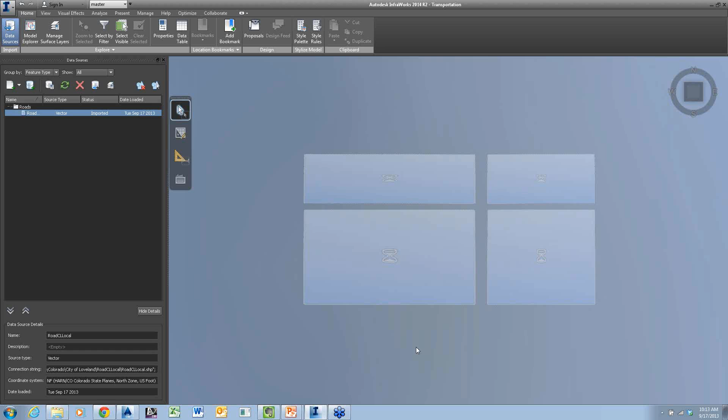I'm going to go ahead and close and refresh this, and it's going to bring that shapefile in and stylize it for me. Got some thinking to do. Now, if you notice, it takes a while to do this - it takes a while for it to take that data, process it, bring it into InfraWorks, and make it into something that it can display. Once you've done this process, it's really quick to open up the file after it's done. It's just the converting it into something that it can read easily that takes a little while.

If you think about it, this is pretty phenomenal to be able to pull this into the system like this, and make it fully usable. And since we're talking water recently, it's on everybody's mind. I've got some water here, some lakes, so I'll go ahead and bring in my lakes.

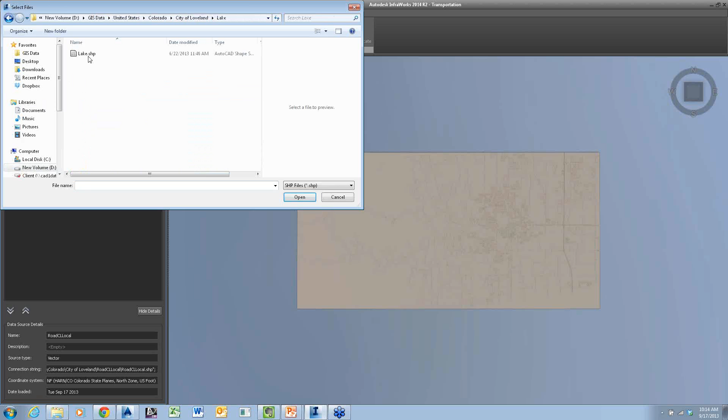Using the same method I brought the roads in, only difference is instead of saying, hey, these are roads, I'm going to say, hey, this is water. And again, this is no smoke and mirrors - this is from, is it the city or the county? I got this from the city of Loveland. Yeah, I configure this data, and I say, hey, this is water.

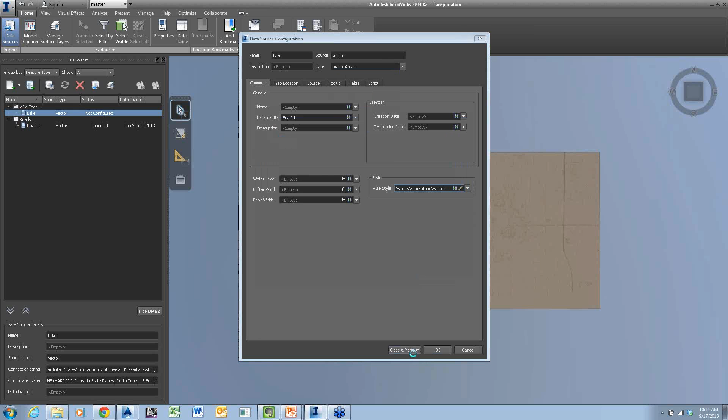I give it a style. I'm going to just use this splined water style, close and refresh that, and it's going to bring in all the lakes in the city. And then I have another shapefile for the rivers that I'll bring in as well, or that I could bring in if my project was near the river, which in this case it's not.

But it is near a lake, so that's why I brought it in. We're going to do a new subdivision next to Carter Lake, which is kind of up in the foothills above Loveland. The only reason I chose this area is because it's got some cool terrain.

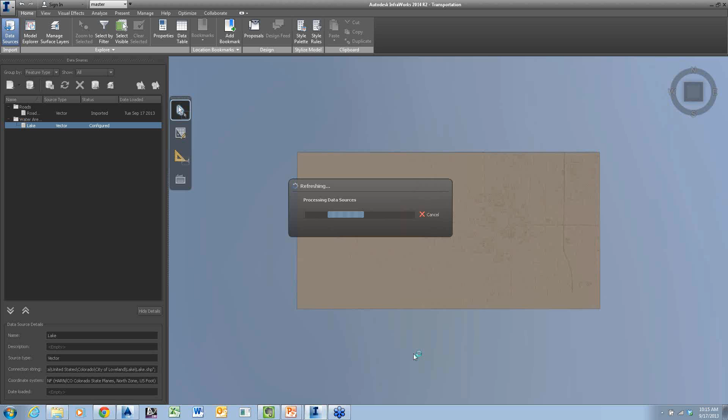Again, it takes a little while for it to process, but I want you guys to see this and how quick it can be after it's done. So it didn't take too long, it did take a little while.

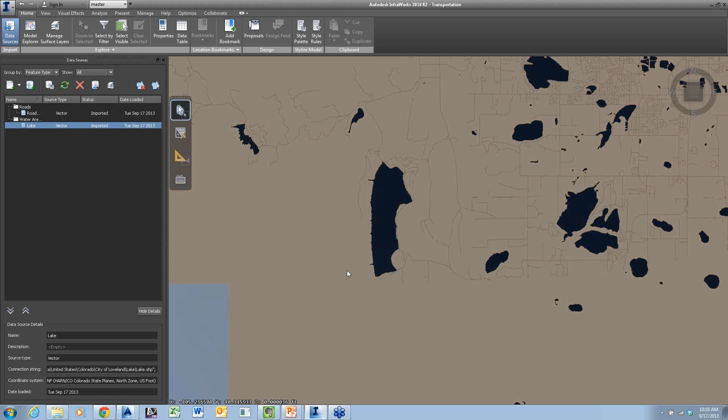Before I start bringing in the intensive data stuff, I'm going to zoom in on my project area. So here's Carter Lake, and we're going to put in a subdivision back here behind it someplace. It's probably National Forest, so nobody can build back there, but I'm making something up for the demo. As I'm working on my project, I don't want to be encumbered by the entire data set, so I'm going to go into my model options and model settings.

I don't want to use the entire model, I'm just going to use a bounding box. Where do I want it to go? Maybe something like this, just around Carter Lake.

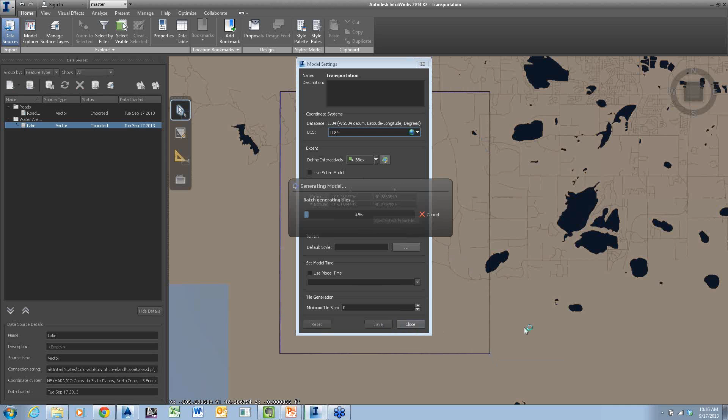Well, what I like is that you're not only doing this for the demo, but you're messing with the man at the same time, sticking a subdivision right on government property.

So I've got other data, I've got terrain, I've got imagery. So let me go ahead and bring those in. Terrain and imagery are all considered raster data sets. Let me go ahead and find those.

While we're finding those, Joe asks a question: is this infrastructure template out of the box or have you improved the styles? This is 100% out of the box, unadjusted by anything.

For most of our webinars, we try to do that so there's no trickery or anything, no smoke and mirrors. Once in a while you have to set something up, kind of the Martha Stewart 'the pie's already baked in the corner there,' but for the most part we try to be out of the box so you can see what you can do with it.

Now, I downloaded a whole bunch of images for this area from the national map. Honestly, I don't know which of those images are for this area, so I just went ahead and connected to all of them. That's why I like putting in this bounding box, because it's just going to show me the area around me.

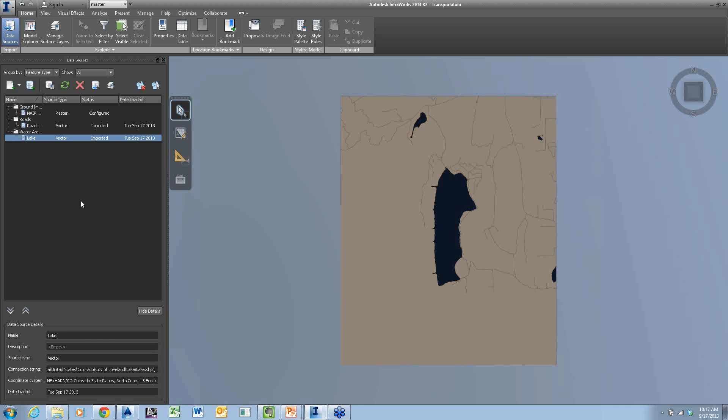Now, before I go through and refresh, let me go ahead and refresh it. So we'll be able to see the imagery, and then I'm going to bring in the terrain as well. Like I said, I drew this bounding box just so I can see this area.

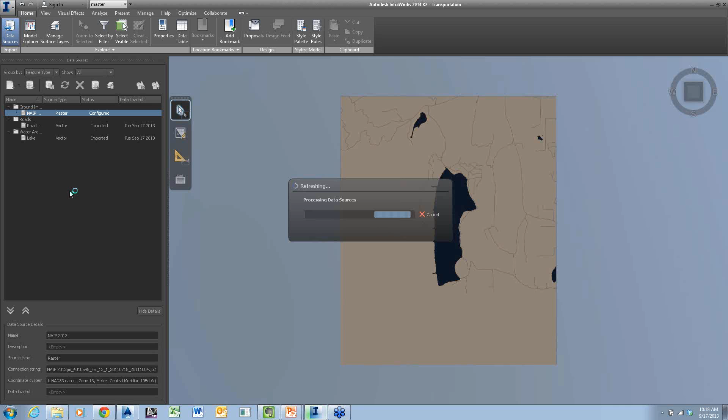Now, Autodesk has a presentation where they did, I believe it was either a 30-mile or 300-mile rail line in InfraWorks, all in one model. So this program can handle a ton of data and handle it really quite quickly.

All right, so there's my imagery, and then we'll bring in the terrain as well. Again, terrain is considered a raster. Let me go find my terrain here for the city of Loveland. So it's a DEM file. I downloaded this from the national map, and as you can see, I've got 2 image files. These are geotiffs basically, it's a .img, but it is terrain.

Now, if you've noticed, as I've done this, I haven't done a single thing with coordinate systems. Everything I've done is just, I want to connect to that data, and I want to connect to that data. I didn't set up a coordinate system for this project, I didn't specify any coordinate systems.

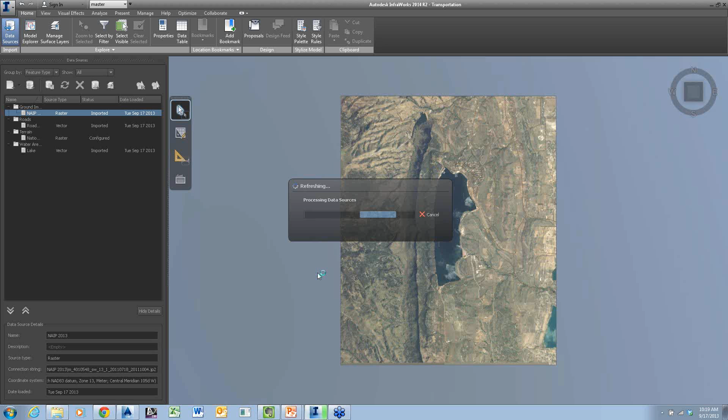As you bring the data in, I think I refreshed the wrong thing here. As you bring the data in, InfraWorks knows the coordinate system of the data, and InfraWorks always works in a coordinate system of lat and long. So I accidentally refreshed the imagery instead of the terrain, let me go ahead and refresh this again. Hate it when I do that.

And this will let us see our terrain. And again, I downloaded all of this data for free. The only thing it cost me was the time it took to find it and download it.

And those funny YouTube videos you watched along the way. The dog getting a kitty and stuff.

And if you want to know where to find this stuff, basically you just go to Google. You go to Google, and you search City of Loveland GIS, or wherever it is you're working. And there's my first hit right there. So look in your cities and look for the county, and it's amazing the information you'll find out there. Just about everywhere I've looked, it's been free.

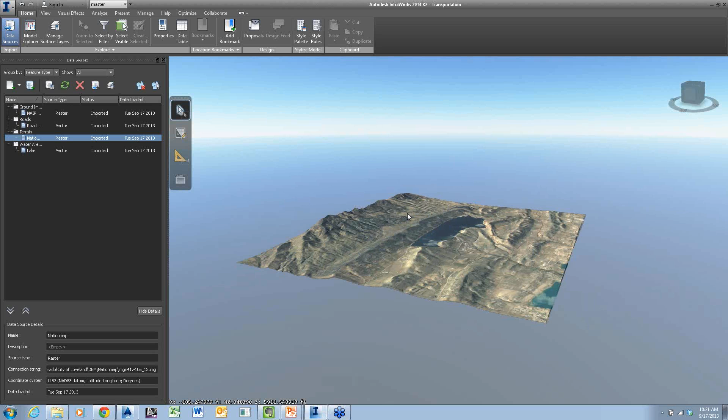I digress. So here's my model, and as you can see, I now have terrain on it. And I can zoom in. Now, through the web interface, this looks very choppy, but on my screen, it's really quite smooth. It's like playing a first-person shooter game.

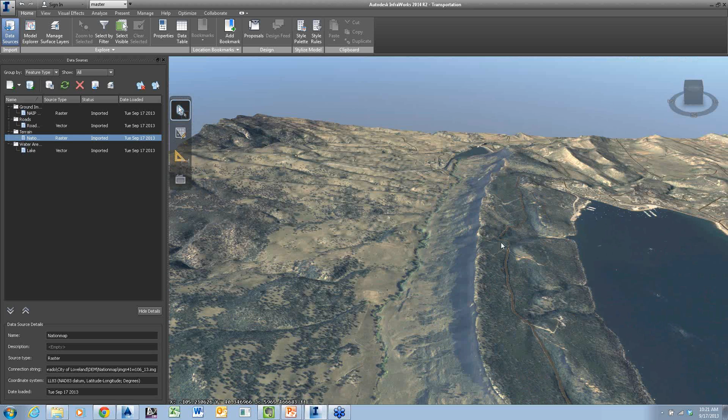All right, so this is the area right here that we want to develop. It's a nice little flat area, but in order to get here, we got to put in a road. The nearest road that we've got, I don't want to come up over this ridge. That's a pretty steep ridge, so this road is not going to be of access use to us. Let's just blow a hole in the ridge. No, we want to keep the ridge because we don't want the nice people over here seeing the lake. Anyways, never mind. So we've got a road up here, and I want to start by connecting into this road.

Now, I'm going to be using the Roads and Highways tools that come with the Ultimate Suite. Now, if you want to get access to the tools that I'm showing you today, you need to do one of two things. You either need to buy the Infrastructure Design Suite Ultimate. If you buy the Ultimate Suite, you'll get access to the Roads and Highways tools. If you don't want the entire Ultimate Suite, you could go with the InfraWorks 360 Pro. Right. And that will give you access to these tools as well.

And you can actually, this is a lease type of a thing where you can just use it for a quarter or a year. So you don't have to spend the thousands and thousands of dollars to buy the software. You spend a fraction of that to get use of it for that term for the project that you're working on. Autodesk is moving in that direction with many of their products, and it's really pretty cool that you can now... You still have the option to buy. Oh, yeah, absolutely. And maybe we can talk more about that sometime, about what makes more sense in any given situation.

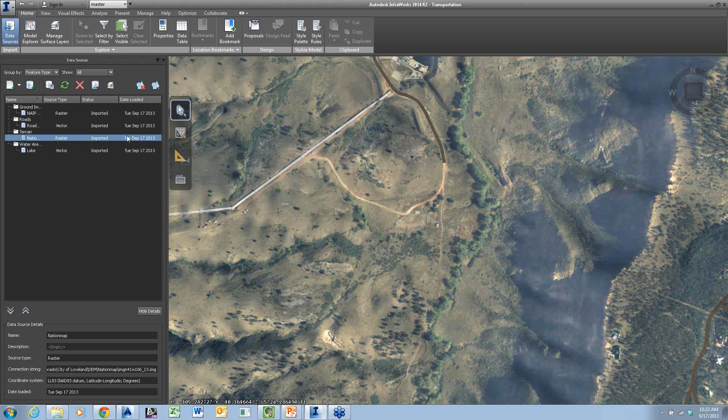Yeah, exactly. So I've got everything done. I'm going to go ahead and save this as a proposal. So this proposal right now is my master proposal. It's as the current conditions. I am going to create a new proposal for this particular road. All right, let's go ahead and just add a new proposal. And I'll just call this one option 1. Maybe I'm going to do 4 or 5 different options to take before the owner and those types of things. So I'll just go ahead and create my option here. This takes a moment because it's got to save the data.

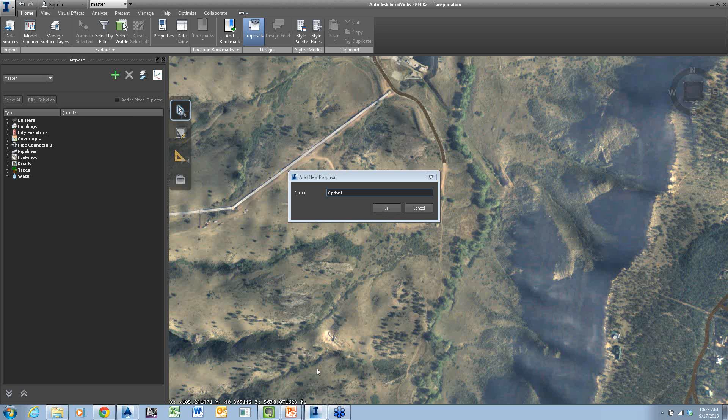And oh no, InfraWorks has crashed. Did it? No, it didn't crash. I just shut it down. I just did that to make a point. I haven't saved it yet. I never once saved. Oh, Brian. I know. Can you believe it? There's the dramatic voice. Thank you, Stan. Add emphasis. All right. So, oh no, it crashed.

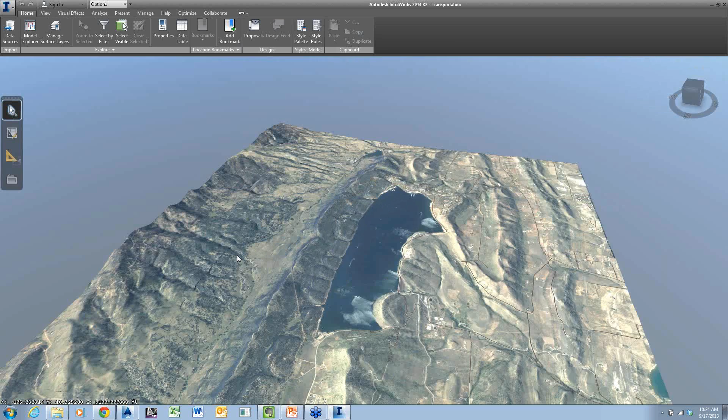So I go ahead and reopen InfraWorks, and I want you to see how quickly this opens again. So here's my transportation. This is the one I just created. No smoke and mirrors here. And I'm back and running. And here's my model. So it automatically saves every time you make a change, which is pretty cool. So okay, I'm going to go make some roads here.

So I've got my proposal created. So I'll come over here and look at my proposals. So as you can see, I've got my option 1 proposal and my master proposal. So I'm working in option 1. Go ahead and close my proposals now. And I'm going to create some roads. So I'm going to come over here to this little bar on the far left-hand side, and I'm going to choose Create Edit Features.

What do I want to create? Well, that's what this bar up here is all about. I want to create some roads. What kind of roads do I want to create? Well, if you're just using InfraWorks out of the Premium, you'll get this option. But if you're using the Ultimate, you'll get the freeway, and the arterial, and the collector, and the residential, and the local.

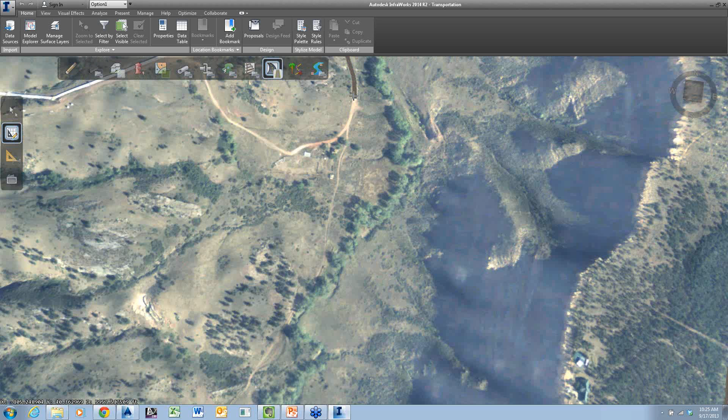So I'm going to do a collector road here. So I select the collector, and I want to tie into the end of this existing road here. We already have a road here, so I'm just going to left-click near it, and I'm tying into it. Now, as I'm laying out this road, do I want to put curves in here? Well, yeah, I'd love to put curves in here.

So I'll go to my curves, and then I'll go to my curve options, and I can put in a default radius. So if you're doing a long, sweepy road, maybe you put in a big radius. If you're doing a little tight road through a canyon, you'll put in a smaller radius. You can always come back and change them later. So I'm going to start off with a radius of, say, 200 feet. Just give me something to start with.

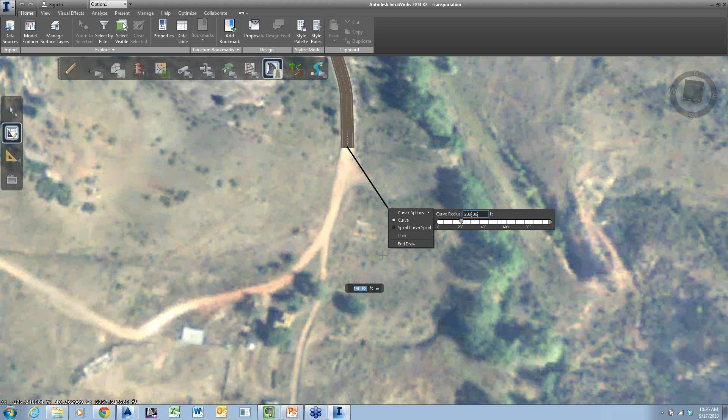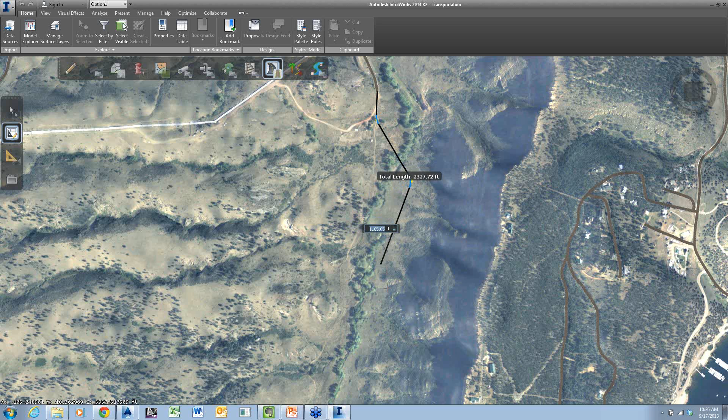And then we'll come over here, kind of follow, let's see, where am I? So I'll go ahead and kind of follow along this existing road a bit. We'll cross over the stream. Maybe we'll have to put a bridge in there. And as you can see, it's automatically putting the curve in there for me as I move my mouse around, right? So I'm going to do this pretty rough. I kind of follow along the stream here. And then eventually the road's going to continue on to service some other subdivisions, perhaps.

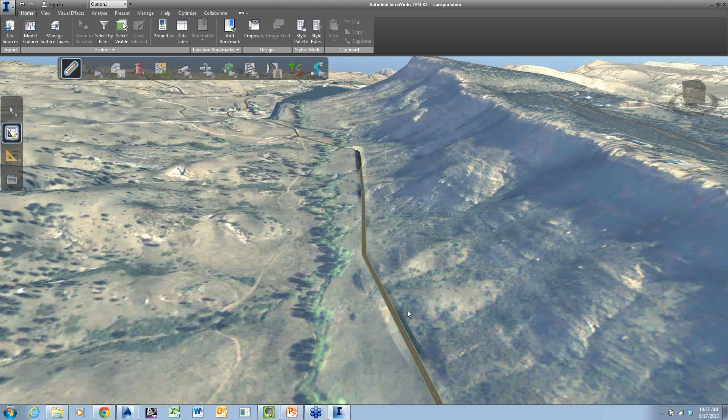But there's my road. As you can see, it automatically conforms to the terrain. It's not the best design currently. Well, the fact that it even throws some sort of conformation up there is pretty amazing. Yeah, so it's not the best design. It's just a first stab at it. We'll come back and adjust that later.

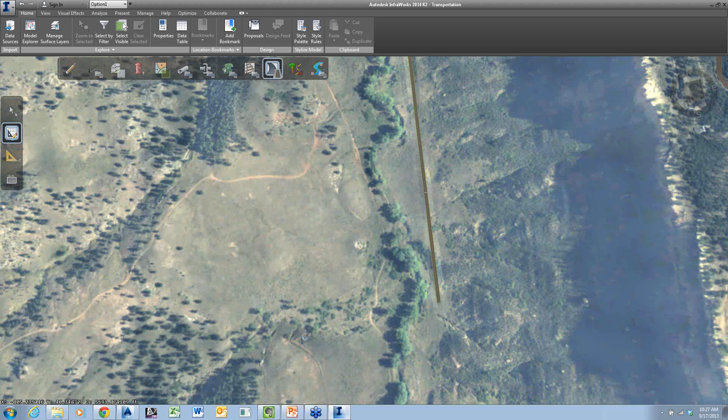But now from this road, I want to put in a tee-off here to service this little subdivision. So I'm going to do the same thing. I'm going to go create another road. I'll do a local road this time. And I'm going to tie into this existing road, so I'll just left-click on the road. And we'll come up over here, and I don't want to do a spiral, so I'll just do curves. And we'll come up here something like this.

No, I might have missed. There we go. So I missed my original pick. I didn't pick directly on the road. So I just used the little tool to adjust it and then put it back. Now, what I want you to note here is we actually have an intersection. Because I'm using the roads and highways tools that come with the Ultimate Suite, I can select the intersection and then choose, okay, what kind of turning radius do I need for this? Ooh, I need to be able to handle some trucks.

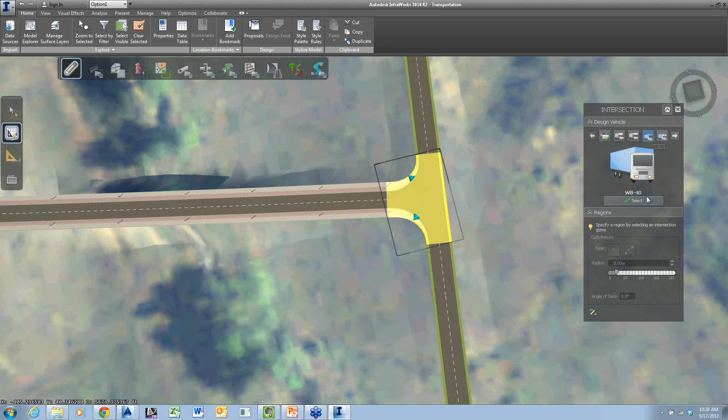Now this isn't a major highway or anything. This is a local road, so it's not like we're going to have the tandem trucks coming down here. So maybe a WB-40. All right, so here's my WB-40 template. I'll go ahead and select that, and you'll see the curve returns adjust for me automatically. Now, if I want to, I can come in and adjust each one of these individually. So I select the little gizmo, as it's referred to. As you can see, it's put a little taper on here before it puts the curve.

Maybe I don't want the taper. I'll go ahead and just say I don't need a taper. I just want to do the curve. Same thing over here. I don't want a taper. I just want to do the curve. And then if I want to, I can come in and adjust the radius of the curve simply by using this grip here.

And so, I like this one. If you want, you can come in here and change the radius simply by typing it. So I want to make it 50 feet, and it adjusts to 50 feet. I'll go ahead and make the other one 50 feet as well. Perfect. I like this intersection. It's a good intersection.

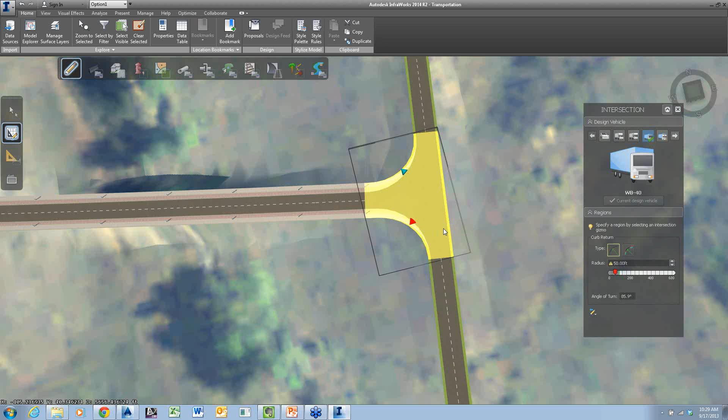But unfortunately, this road right now, it's not quite going to work for what we're trying to do here. I'd like to be able to adjust the elevations of it because, again, because I'm using the Ultimate Suite, I can grab it, I can go to the View tab, and I can take a look at the profile for this particular road. So we're probably going to have to put a bridge in there. That makes sense to put a bridge over the stream. But the rest of it, it's not quite looking very good.

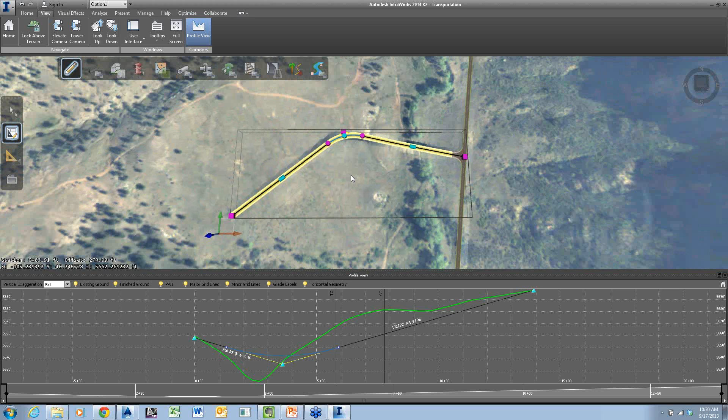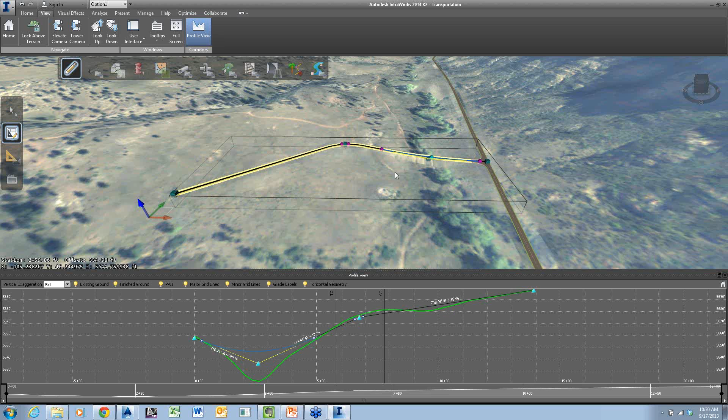Now I think we should probably have another PVI up here somewhere. So within the profile view, I can right-click and choose Add PVI. It'll add the PVI to my plan, and it puts in a nice little small curve. And you know what? I think we should make this curve a little bit longer, so I can just grab these grips in the plan and adjust the curve length right there. There. Now that's a well-designed road, don't you think? If I do say so myself.

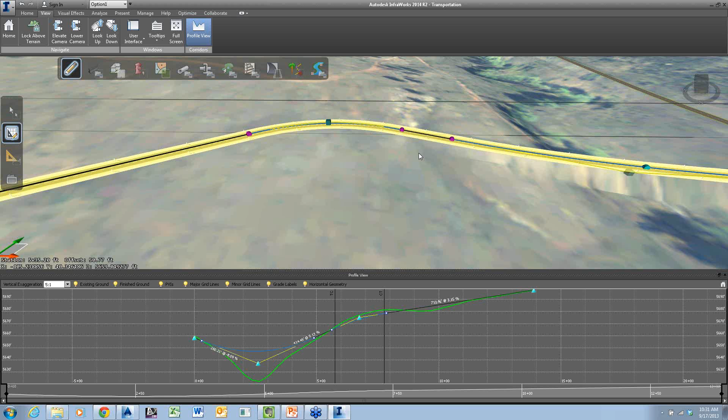And now I can come in here and start putting houses in here and whatever else I need. So this is the planning portion of it. I really like the new intersection tools. I think it's got a lot of potential.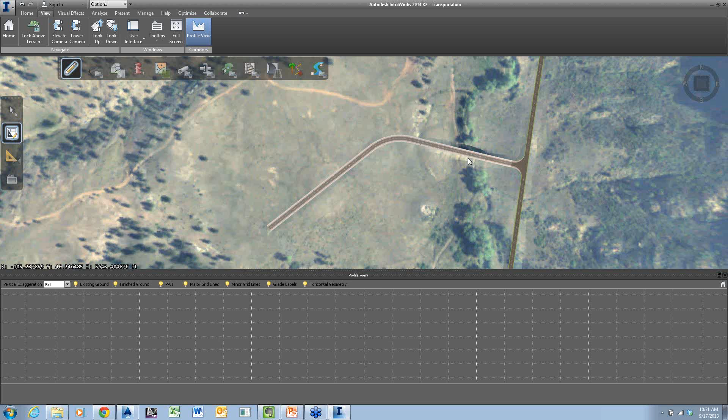Robert was asking, can you get the same orientation on plan and profile? So I'm assuming you mean line up the plan and the profile. Not that I'm aware of. I don't think there's a button that says line them up. As I select it, you'll see the profile is selected. As I zoom in, the plan is wherever you want it to be. But

as I work in the plan, so if you see as I grab this PVI in the plan, I can actually adjust it, and you can see it adjust in the profile as well. So there's no way that I know of to automatically line it up. You can pan or zoom and pan within the profile to see whatever you need.

And up here along the top, you have a vertical exaggeration. All right, so I'll set that back to a 10:1, and then, oh, maybe not a 10:1. We'll go with maybe a 5:1 here. That looks better. And I can turn off things like the existing ground, the finished ground, the PVIs, the grids, the minor grids, all of that fun stuff. So

I think this is one of the best products Autodesk has come up with in a long time. And, you know, Autodesk even says it's kind of dubbed the Revit for the civil world or the infrastructure world. And I don't know how many of you have seen Revit, but it's really a fascinating product. It's been well adopted in the building industry.

And this has that same potential to really investigate things quickly, try out different scenarios quickly, and then move from the thinking about it stage and the planning stage to the, okay, now we gotta put this thing to paper stage. So. Right.

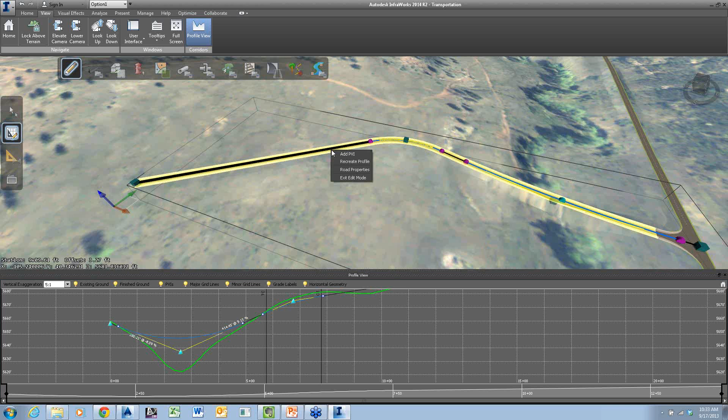We might be able to. I've never investigated it. Let's go to the road properties and find out, shall we? If we can, it would be here.

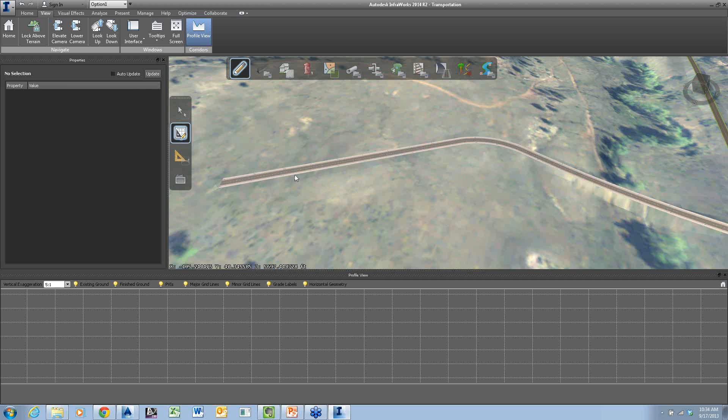Doesn't look like we can. So the stationing is just what the stationing is. If you want to reverse the stationing so it goes the other direction, draw it the other direction when you start. Again, we're not really concerned. This is not a design. This is the planning. Let's get a rough cut, right? Show the approval committees, show the public hearing people. Exactly.

And Robert asked, the plan appears to have east to the right, while the profile has east to the left. Okay. There. Now they line up. So you can view it from any direction you want. The profile, I don't believe, is something we can reverse. Yeah. It is the way it is. But again, this is planning, so you just look at it however you want it to look.

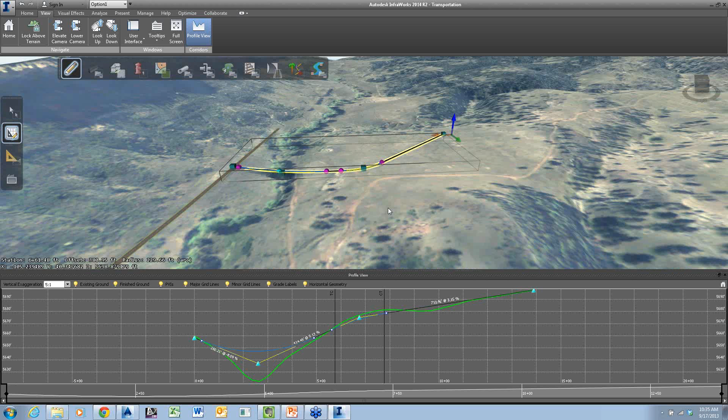Right now, I think it's important to start realizing that this can be added to a firm's workflow to help with, as Brian's saying, the planning process, so forth and so on. In the past couple years, we've seen a ton of tools added that are moving it more towards a true engineering tool. But right now, you just have to take it for what it's worth as part of the workflow process. Exactly. And every single release, they've gotten it better and better and more and excitinger and excitinger.

Yes, that's a word I just made up. Yes, it is. All right.

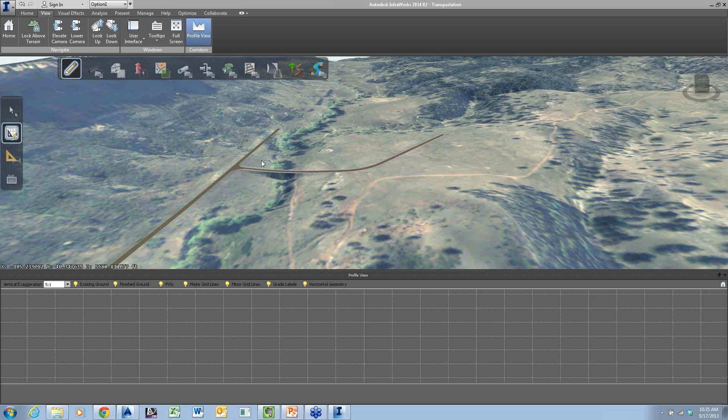So once I get my roads laid out here, let me go ahead and go to plan view here. Let's make north kind of be up, shall we?

Ring, ring. Oh, it's Mr. Webster saying, quit making up words, Brian.

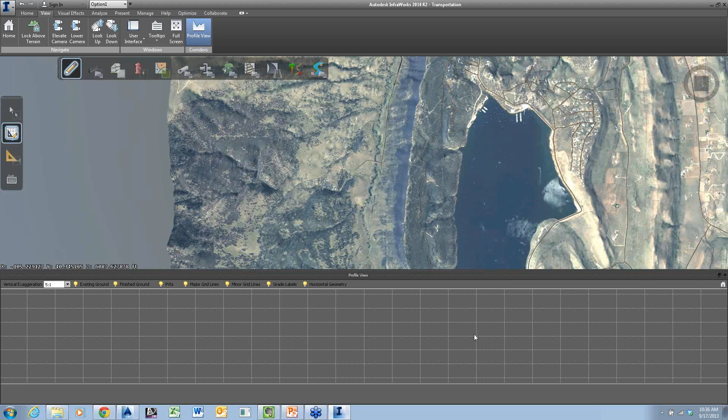And let me go ahead and close out my profile view here, so it just gives me a little bit more room. And with the main road, I can do the same thing. So once I get this all happy and designed and everything, I'm going to go ahead and export this to an IMX file so I can bring it into Civil 3D. And I think this is one of the things that is most fascinating about this, is that this isn't a throwaway. It's not like a SketchUp that you create this concept and then you have to start all over again anymore. Exactly. So we're moving right now from the planning phase into the design phase.

I don't want to use the entire model. I just want to do a piece of it. So I'm going to do a box. And that wasn't quite what I wanted, so we'll try that again. We'll start down here maybe. There we go. So that's the area I'm interested in. All right, if you know the coordinates, the latitude and the longitude, you can do that. Maybe I want the extents of this one file here. You can do things like that.

And then where do you want to put it? So I'm just going to throw it on my desktop now. I already have one on my desktop from doing this earlier, but I'm going to go ahead and do this again, and it's going to tell me, hey, you've already got one there. Do you want to replace it? Yes, I do. So this is now creating the IMX file. So now I'll switch over to Civil 3D where we can start doing our design. And I'm going to create a new drawing.

Now, I don't know if this is something I'm doing wrong or if there's an issue with the software, but when it exports out the road, it imports them into Civil 3D as meters, but it doesn't convert the meters back to feet. So I'm going to pretend I'm working in the future where we finally made the change to the metric system like we should have done like 50 years ago. I'm going to go create a new drawing. Hey, now, this is America. And I'm going to use the metric template.

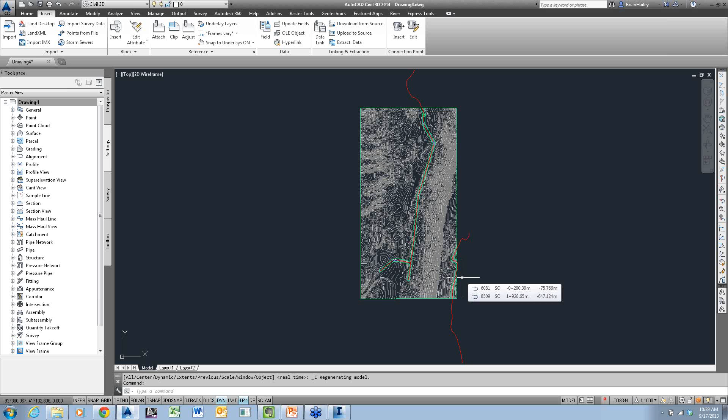It is a surface. I can take it into my object viewer, take a look at it, and yes, there's my beautiful surface. It also created a surface for my transportation, for the roads, right? So there's my road. And I have another road over here from the shape file that I imported.

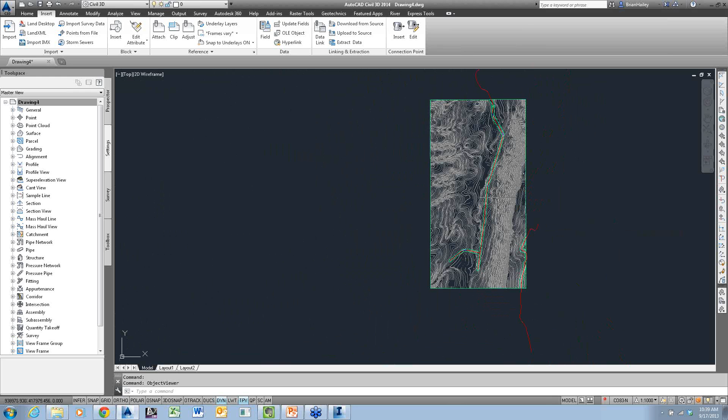But what I want to do now is I want to create a profile view. So I'm going to focus on my little road here. In InfraWorks, I didn't get the option to name it. So let me go ahead and rename this. I'm just going to double click on it. The name, I don't want it to be 8510. That doesn't make any sense to me.

I'm going to call this one Becky's Way. Name it after my wife.

And it's Becky's Way because it's always her way. Well, I guess Becky now has her way. Yes, she definitely does.

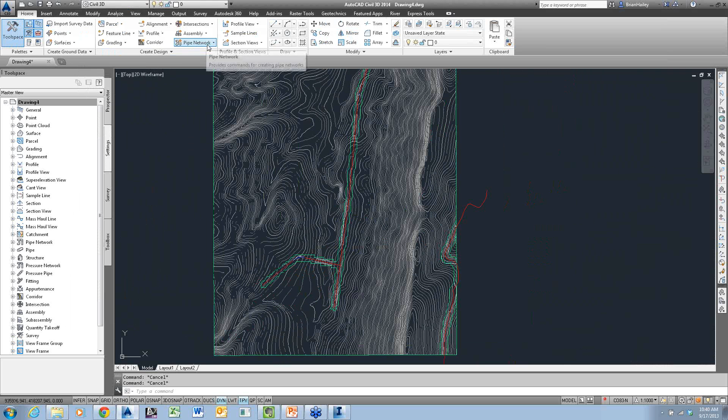All right. So the reason I renamed it is just to make it easier to find in the list when I come over here and I create my profile view. So I'll go create my profile view. Oops. Profile view. Create my profile view. This is basic Civil 3D stuff. The alignment name is going to be Becky's Way. Walk my way through it.

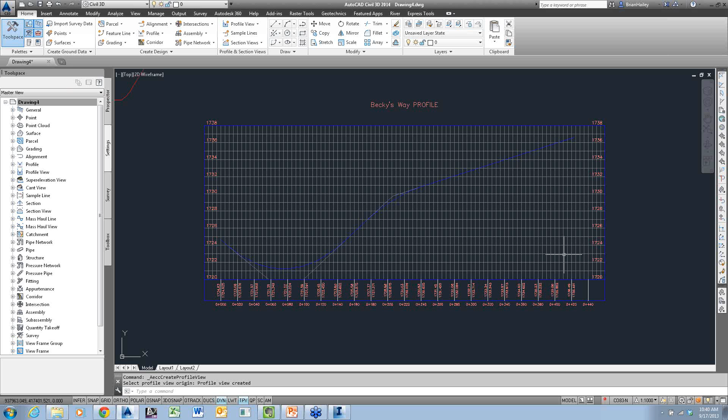You see my profile display. So I do have a profile. That is the design profile. I'll go ahead and create the profile view, bring it over here, and there is my design profile. So if I did this in an imperial drawing, the profile would look much shorter because it doesn't convert it back to feet for some reason. I'm going to have to contact tech support, see if there's something I'm doing wrong or if it's an issue with the software. But it works fine in a metric drawing.

So I know, let's all switch to metric. No. Stan just said what everybody else was thinking.

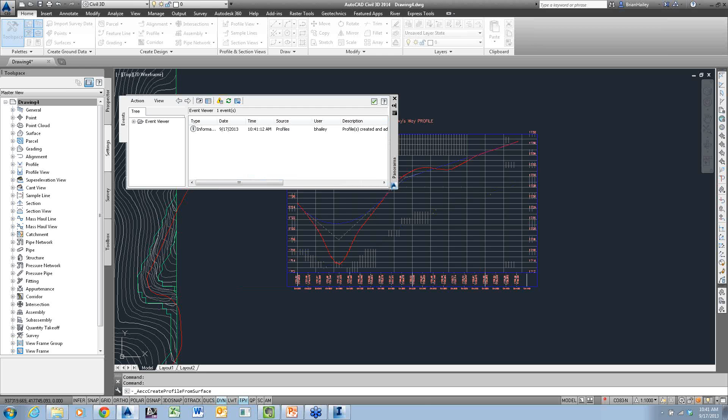I'd like to see the surface as well, so go create a surface profile for the same road. All right, I'm going to use the existing ground, add that in, and so I can see the existing ground as well as my design. So the design phase, I need to put in an assembly. So we create a corridor.

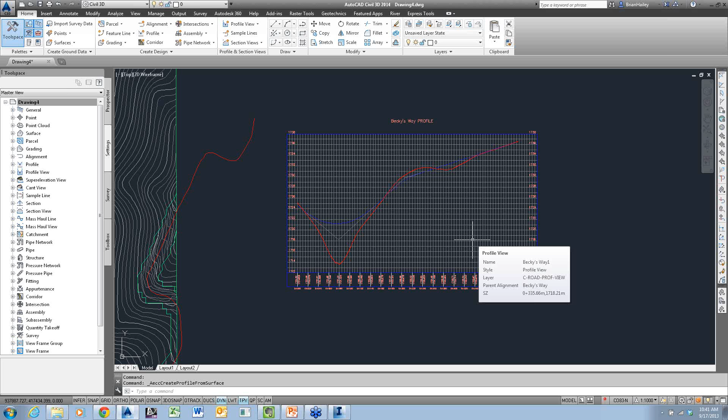So when we're doing a design in Civil 3D, there's three things you have to have. You have to have an alignment, you have to have a profile, and you have to have a cross-section. Well, we got two of those three things out of InfraWorks. We got the alignment, we got the profile out of InfraWorks. So I need a cross-section. If you're familiar with corridors, right, that's just a tool palette. That's just an assembly. On my tool palettes, I have some assemblies that are already created. I'm not going to go through the process of creating a brand new assembly.

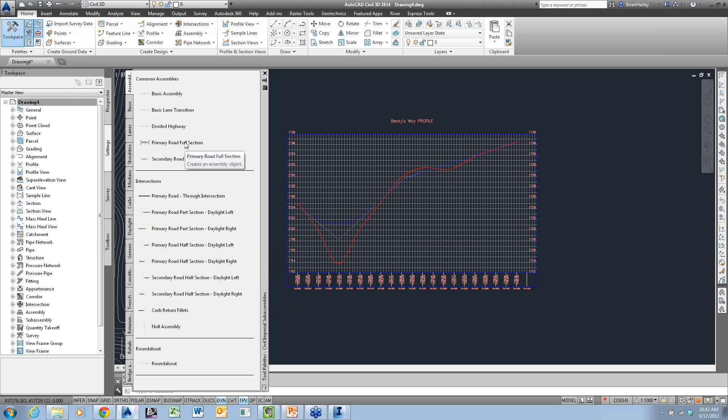I'm just going to use the primary road full section. I know it's here somewhere. Primary road part. Am I not seeing it? Half. Oh, it's up here. Primary road full section. So this is just an assembly. This is what I want my cross section to look like. Ooh, that's beautiful.

All right. Oh, you know what? This is a metric drawing. Actually, yeah, I need to change to my metric sub-assemblies. That'll help out a little bit. So I'll put in my primary road full section. That looks a little bit better.

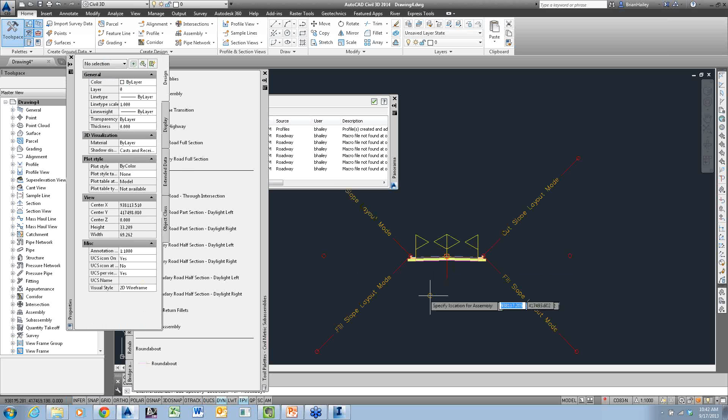All right, so I want to take this and I want to use it for my road. So I create the corridor. Alignment, profile, section. Take those three things, combine them together, mash them together. All right, give it a road. I'm going to use my favorite subdivision name of all times, Vista View Estates. Yes, that's a real subdivision in the city of Loveland. I guess this would be Vista View Estates 2 then.

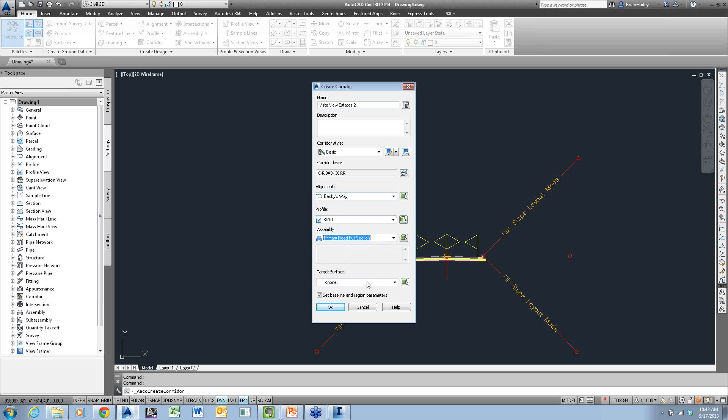Choose the appropriate alignment, choose my profile, choose my assembly. If my assembly can target a surface, what surface do I want it to target? So I'll have it target the existing ground. And just go ahead and build my corridor. And you can see how quickly this is done. There's my corridor in Civil 3D.

And we have a road. That wasn't so hard. All right, so let's talk a little bit about some of these.

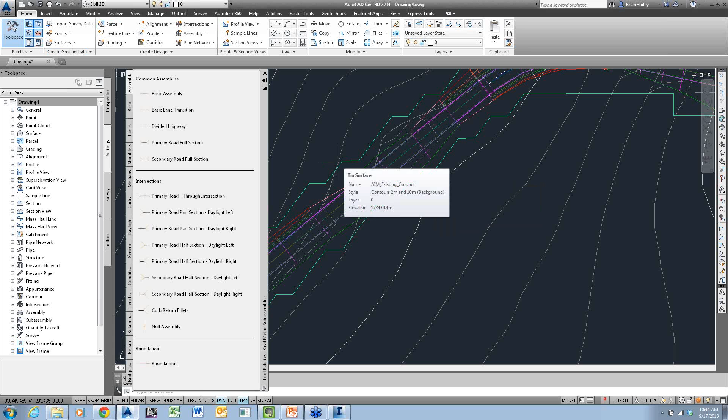I'm not going to get into demonstrating them, but I do want to talk about them because most of the roadway work that's done out there, or a lot of it at least, unless you're doing a brand new subdivision, is rehabilitation, reconstruction, widening the road, doing a mill and overlay, those types of things. Civil 3D comes with a whole slew of sub-assemblies geared towards that particular stuff, and they're on the Rehab tab of your sub-assemblies.

So one that I think is really cool is this one here, the Overlay Widen Match Slope. If you're ever curious as to what a sub-assembly will do, just right-click on it in your tool palettes and go to the help. They have done an absolutely outstanding job with the help for sub-assemblies.

Basically what this does is take the sample points and the insertion point of the sub-assembly, and calculate the slope between them. Then based off of that slope, it puts in this widening at the same slope, so I don't get a break in the cross slope. I simply want to extend the current grade out. Doing this by hand, you'd have to recalculate this at every single one of your cross sections so you don't get the bend in the lanes. This will extend that out for you.

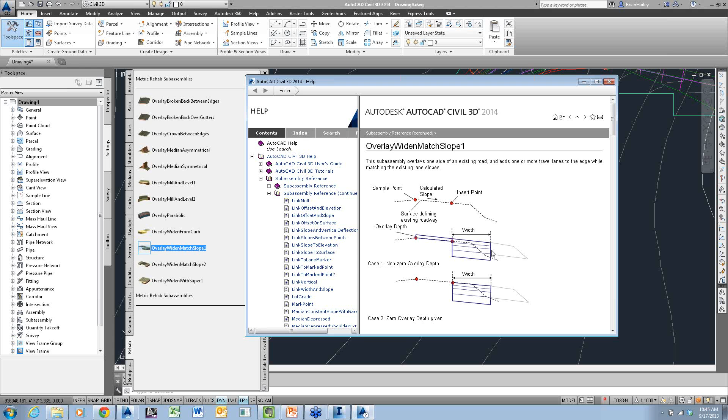You just come in here and put in your different parameters. It's going to ask for the sample point offset, so I want to offset 10 feet to match the slope, 10 feet to the left, 10 feet to the right, whatever the case may be, and how wide you want it to widen, those types of things. So if you get a chance, check out some of these things.

Let's take another look at one. So we got this Overlay Broken Back Between Edges. Again, I right-click on it and go to the help. So I want to overlay, I want to match the existing curb and gutter, so I'm going to mill this out a little bit, but I don't want to have to mill all the way down, so it'll put in different depths for you.

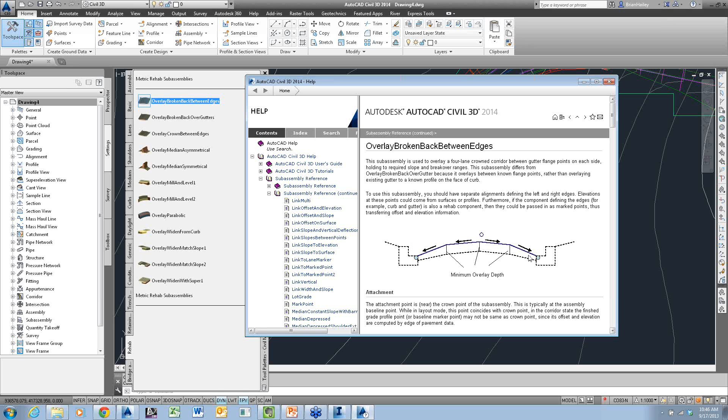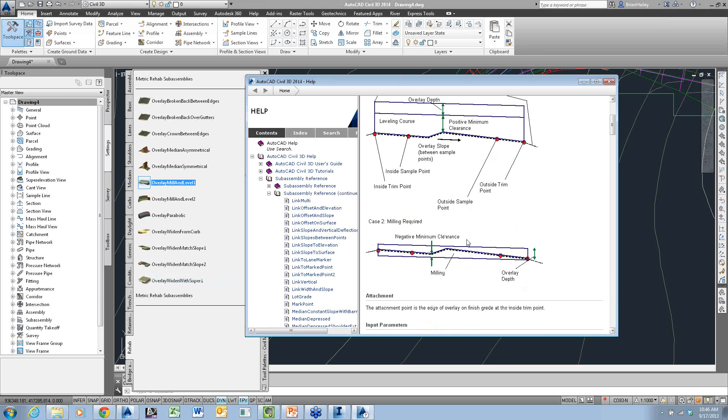Mill and level. So we got a couple of different options here, so if milling is required, or if it's not required. And there it is. So for those of you guys that work for the county or the city, well, most of your work is rehabilitation, so check these things out; they're fantastic.

All right, so I got a few minutes left. Let's go ahead and build this thing.

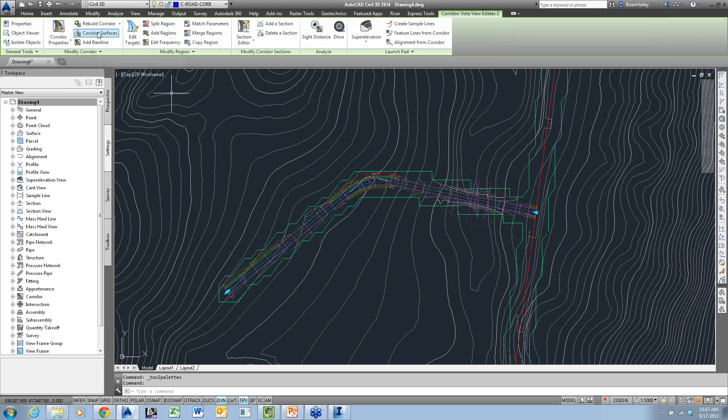So once I get the corridor created, what do I do with it? Well, you create cross sections, you create surfaces. If you're using machine control grading, you can send that surface directly out to your machine control grading.

So you simply grab the corridor and go to the corridor surfaces and have it create your surface. Way over here on the left, you can create multiple surfaces. So I just want to create one to send out to machine control grading for doing the subgrade, so I'm going to call this one datum. This is going to represent the bottom of my road, this is what I'm going to send to machine control grading. And I'll set this to 1 meter and 5 meter design for the style.

Now right now this surface still doesn't have any data, so I need to add some data to it. We got two different types of data, links and feature lines. If your corridor is very prismatic, meaning the cross-section doesn't change much, you can get by with doing the links. If you've got a very erratic cross-section for your corridor, you're really going to want to use the feature lines for it. But in my case, it's very prismatic, so I'm just going to go with links.

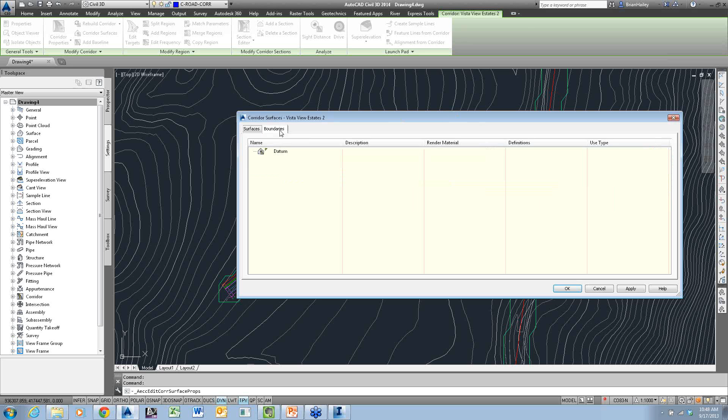And I want to do the bottom link, which in this case is referred to as datum, so I add the datum link to the datum surface. Do not add the top link and the datum links to the same surface. That just can't happen, so don't do that. And then I'm going to go ahead and add the extents of the corridor as a boundary to this surface.

I'll go ahead and rebuild the corridor. Oops, something odd happened here. Did I not get my boundary added? I did.

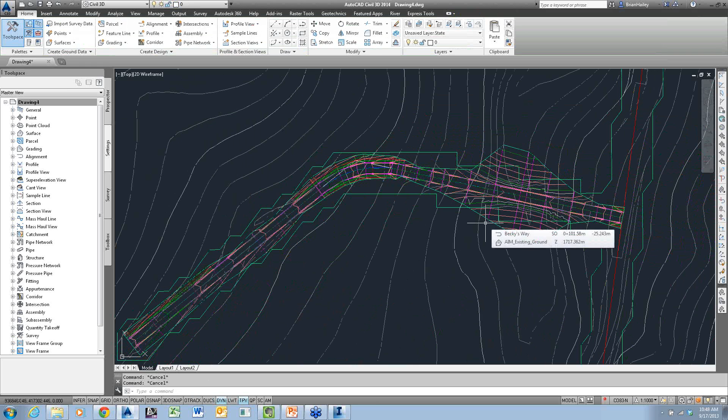Oh, there we go. Hit the wrong button when I went to rebuild. And there's my corridor. Let's go take a look at this.

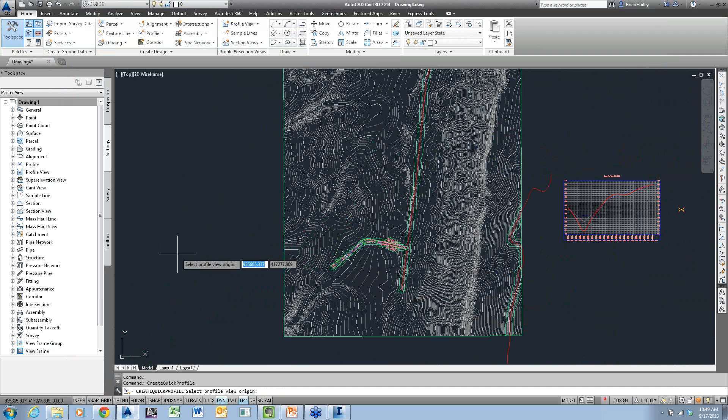Now you might notice that doesn't quite look right. One thing I always recommend, let me do a quick profile through here. I'm just going to draw a polyline across here and do a quick profile, and we'll throw it off to the side. As you can see, this datum surface really doesn't make a whole lot of sense.

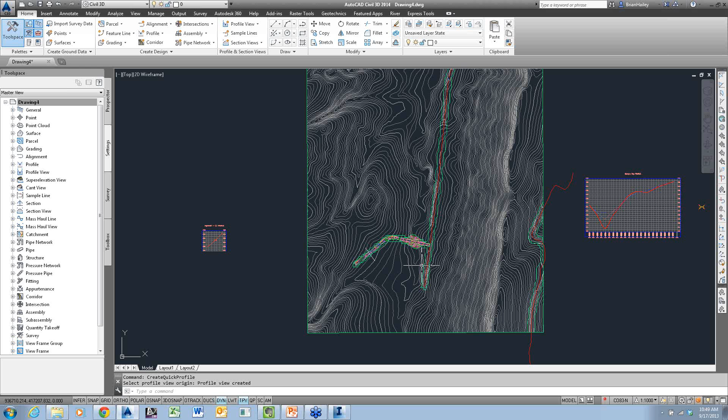So what's going on here? Well, I didn't put any overhang correction on my corridor surface. If there's one thing you take away from this webinar, pay attention now. We see all those little yellow triangles whenever you create a corridor surface, without exception, absolutely every time you create a corridor surface, always, always, always apply an overhang correction.

I don't care if you don't have an overhang - apply an overhang correction. If you don't have an overhang, it's not going to do anything. But if you have an overhang, in this case I have two datum links that overhang each other. A surface can only have one elevation for any location, any horizontal spot - it can only have one elevation. If I have two links that overhang each other, it blows up.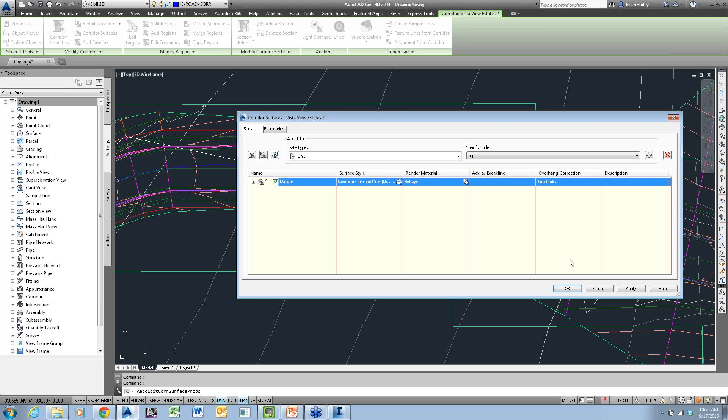So if I assign - I don't care which one - just assign one. And now if I go take a look at my cross-section, hey, that looks a lot better.

So what happened here? Let's go take a look at my subassembly. I have an overhang right through here. I have a datum link for my subbase, and I have a datum link for my daylight. There's two datum links here.

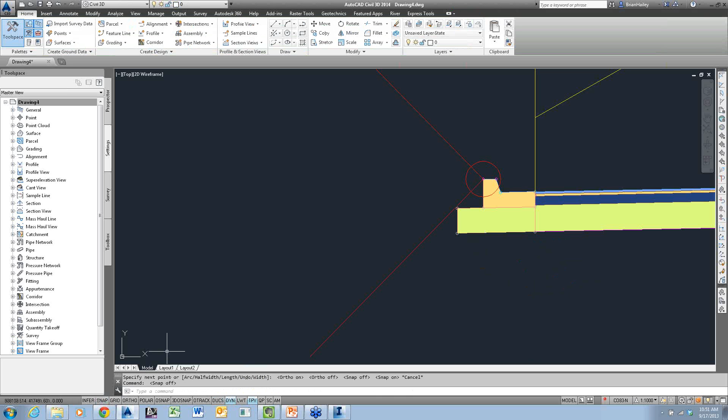So which one's right? Well, Civil 3D doesn't know. So basically what it does - let me draw a polyline. Let me assign a width here real quick. Something like that.

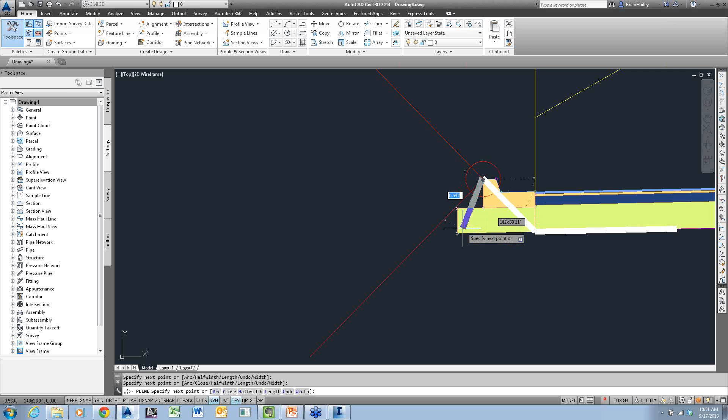So it comes along and says, okay, I've got a datum here. Where is my next datum point? Well, it's up there at the daylight. That's way up here. Where's my next datum point? Well, it's down there at the subbase. So it goes down there. Where's my next datum point? Well, it's up there at the daylight. So it kind of connects to the daylight.

If I put in an overhang correction, it comes along, same thing, and says, oh, let me put this on a different layer that's a different color. So it comes along and says, I've got a datum link here, I've got another datum link, so I'm going to follow along that datum link until I get to an overhang. Now I'm here at the overhang.

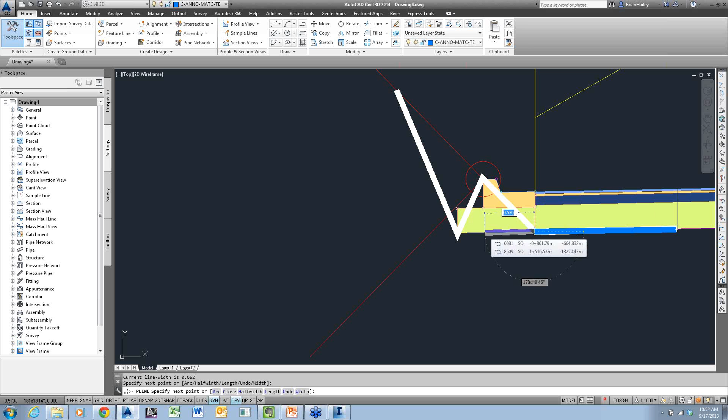Which overhang is correct? Well, if I choose top link, it's going to stop here and then go up to the top link and follow along that top link. If I had chosen bottom link, we've started over here, come along here, and now we get to this overhang, so it's going to continue along the bottom link, and then once it gets to the end, it's going to go up to the top link and follow along.

So neither one of them is perfect, but it's a lot better than that white line. So please, please use an overhang correction anytime you create a surface.

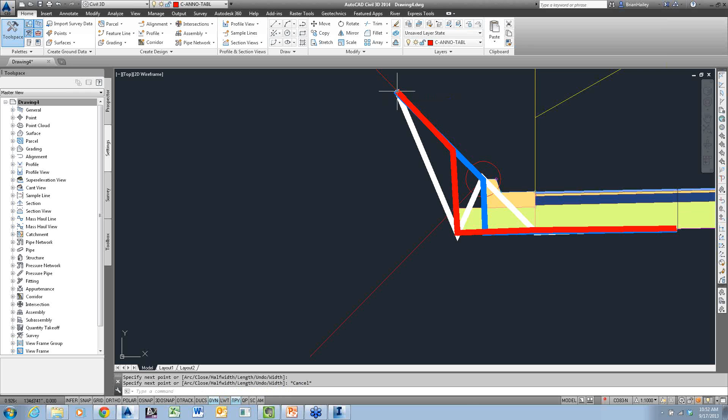And now I've got the surface. I can export this surface out as an XML file, and then my grader, my contractor, can upload that into his bulldozer and build the road. How do I do that? Well, I simply go to the Output tab on my ribbon, Export to LandXML, and then I can select that surface from the drawing, and it'll create an XML file for me that the contractor can then use.

Sometimes we need to get a little old school and get some points in here. I want to know where the corridor daylights to the existing ground. I need to go out there and stake that. I want to know where the limits of my disturbance will be, so I can go out and investigate this.

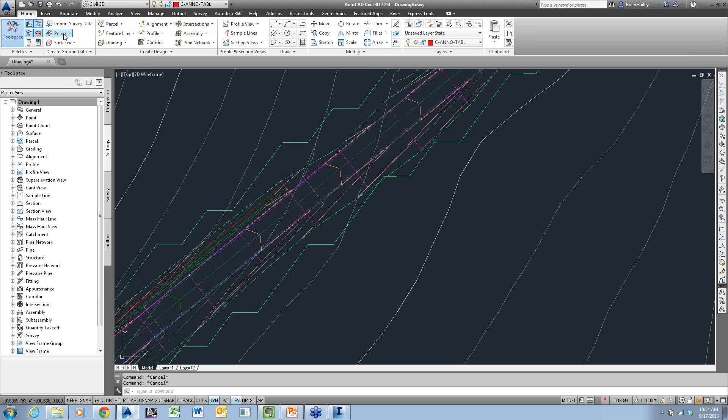So I simply grab the corridor. Under the launch pad, I can choose Points from Corridor. Another way to access the same command is under the Home tab, Points, Create COGO Points from Corridor. They both do the same thing.

All right, where do I want them? Do I want the entire corridor or just a piece of it? I'm going to do it for the entire corridor in this case, and I'll put it in a daylight point group. So it's going to create a point group, take these points, and put them in it. And then which codes do I want to import?

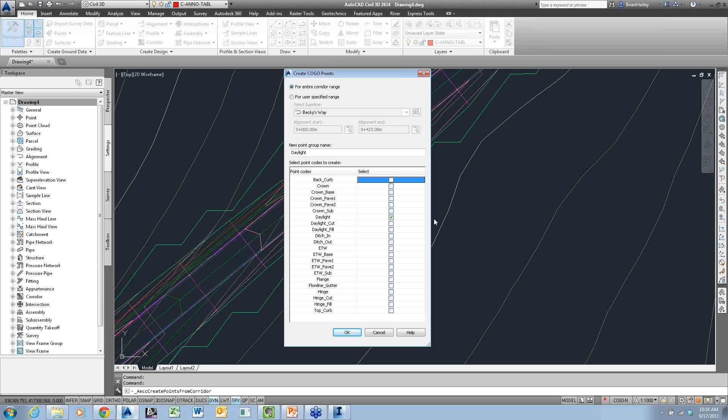In this case, the only one I'm interested in is the daylight, so I'll uncheck everything else - there's no other way that I know of to do this. So I have just the daylight toggled on. I select OK, and it creates points at those daylight points for me.

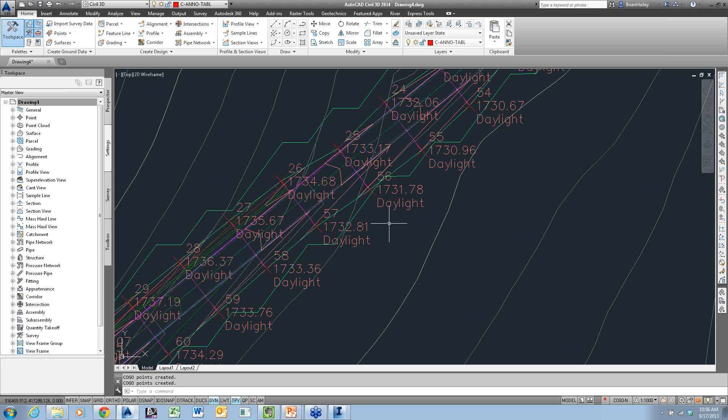Looks like we've got a question here. Robert asks, does the daylight option include daylight cut and daylight fill? When I created these points, I chose the daylight option, so it created it at the daylight line. If I wanted to see just where I was in cut or just where I was in fill, when I create my COGO points from corridor, I would toggle on daylight fill or daylight cut. So I can specify them differently if I wanted to, but the daylight does include both cut and fill.

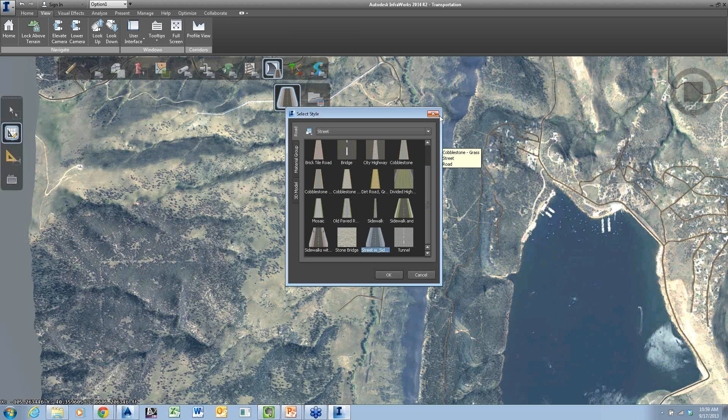Now, one thing you can do is there is a styles manager. So I have a style palette. And I can come down here to streets, create a new folder called airport. And in here I can add new road styles.

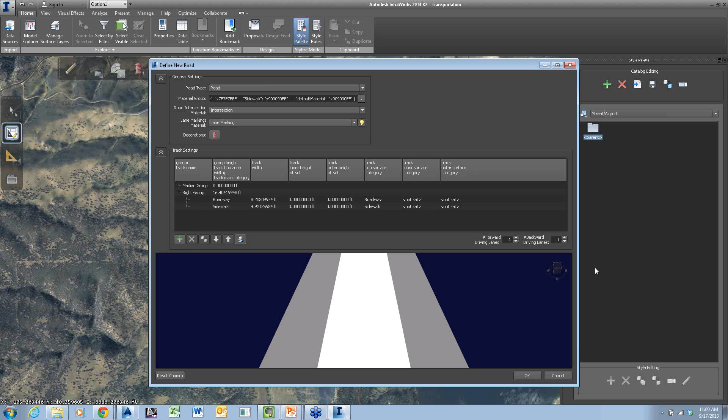And so this is how all the roads that came with InfraWorks were created, including all the little bollards and light poles and trees in the middle of the medians and things like that using this particular tool. So in here, you can create your own runway, taxiway, whatever you need. So hopefully that'll work for you. Like I said, I've never actually done anything specific with airports and InfraWorks.

You know, maybe that's something, though, I don't want to put something on you there, Brian, but I think it would be interesting to know if there's a source for data similar to the city stuff for airports. I wouldn't be surprised if there's not. Yeah, and I imagine that's one area that Autodesk is probably interested in, for planning new airports and things like that. Well, Autodesk is noodling around out at DIA an awful lot. They're real interested in that project. So we know a couple guys who are out there. Maybe we can ask them too.

Lisa says the numbers are the biggest problem. Would the camp be beneficial to us? Lisa, the camp's going to be general, from the point of view of kind of broad-based, of course. So to say, will we work with airports specifically? No. But without hard selling you here, I'd like to think you'll get quite a bit out of it. And the classes will be small enough that you can bring some of those questions like you're asking here and hopefully get a chance to explore around some of these ideas anyway.

Yeah. You might also consider doing a styles class or something like that for your group if you haven't already, so we could help you make some of these definitions. And I've worked with quite a few people that have done airports. I just haven't done any in InfraWorks. The taxiways and the runways, as far as Civil 3D goes, they're just big, wide roads. And the markings, yes, those can be a little bit more complicated. You're talking about putting numbers on runways and things like that. I'm not exactly sure what the best way to approach that would be in InfraWorks, but I'm sure it can be done.